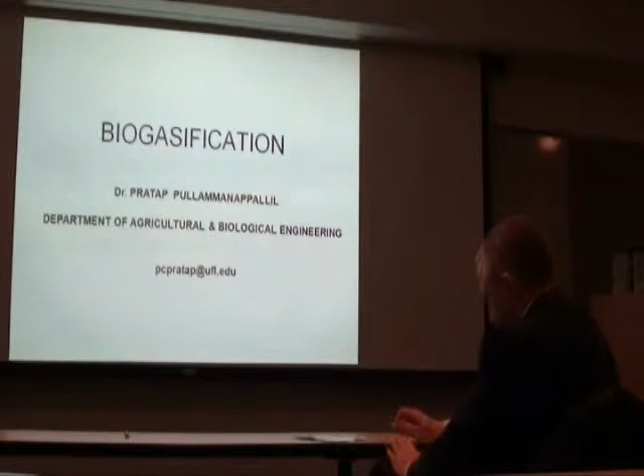We in this department have been working on what's called biogasification, that is producing gas fuels from solid biomass feedstocks. It could be biomass feedstocks, or municipal urban waste, yard waste, organic waste, food waste, all sorts of residues. The process involves using microbes, bacteria, to convert the solid waste.

Particularly the solid organic waste, to methane as a fuel. So the biogas is a fuel that's produced. It's a mixture of methane and carbon dioxide, about 70% methane. Some of you will be aware of this process as anaerobic digestion.

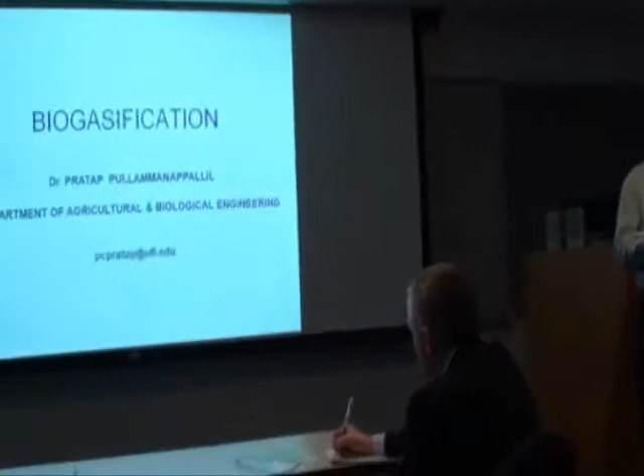Typically, anaerobic digestion is used in sewage treatment plants, to convert sewage sludge to biogas. It's also used for manure digestion, from livestock waste. But you can also apply the process for other feedstocks, like high solids feedstocks, energy crops, municipal waste, or any other organic matter.

We have been working on this area for the last 10 to 20 years, and have developed several designs. Some of it has gone commercial, some are being commercialized for different feedstocks. So I'll give you a run through a few examples of what we've done in the past.

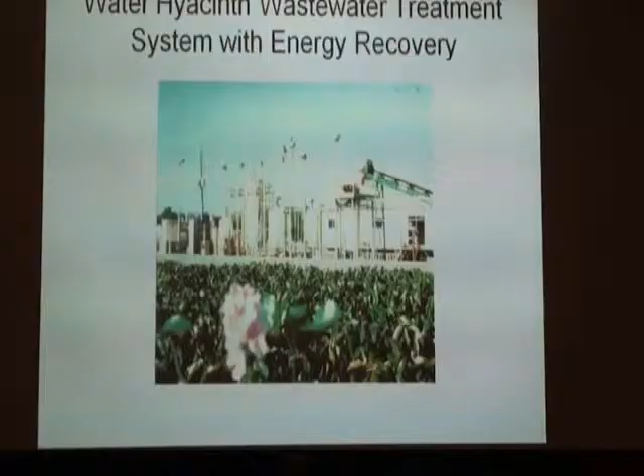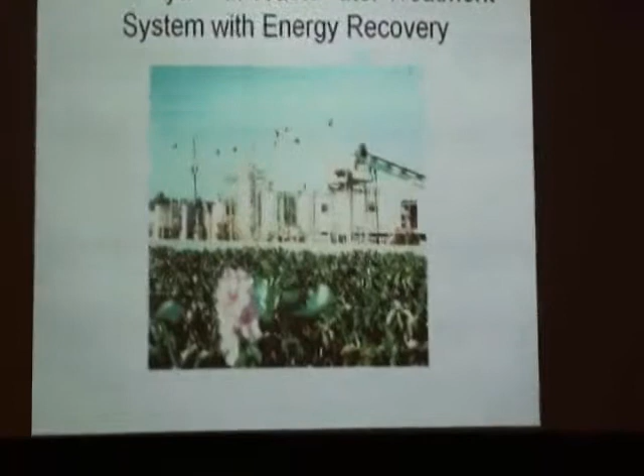We had it in Walt Disney World down in Orlando, the Epcot Center. This particular project ran for about 5 to 6 years. The purpose was to take the wastewater generated in the Walt Disney World Resort and treat it using the water hyacinth.

Water hyacinth is an aquatic plant. It takes up the nutrients and treats the wastewater. Then the next step was to convert the water hyacinth to energy, to biogas fuel.

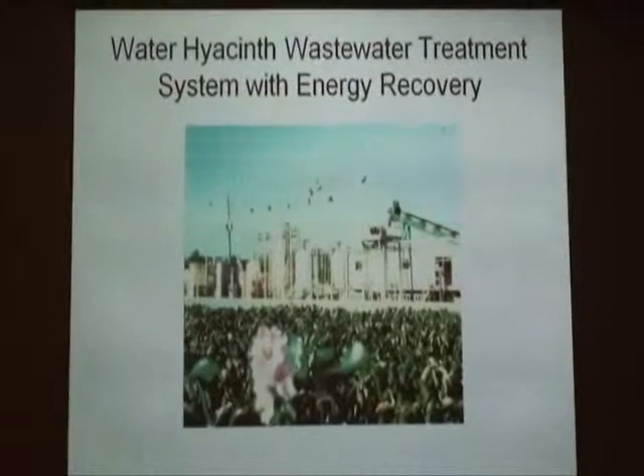So the water hyacinth was harvested and put into a digester. This is a digester. It's where you convert the water hyacinth to biogas as a fuel.

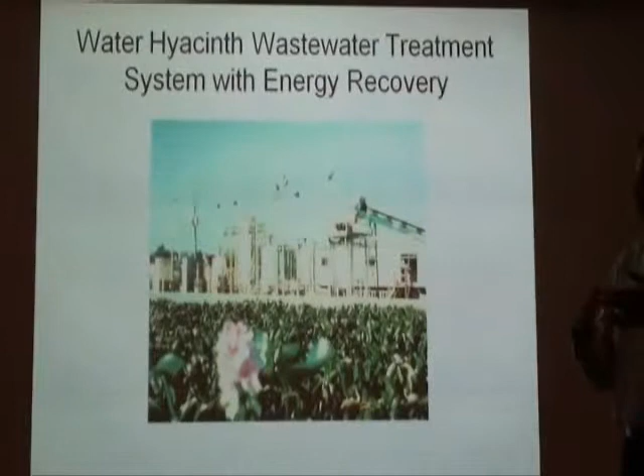This particular project was carried out for about 5 or 6 years, and this is like a demonstration project. What we demonstrated there was treatment of wastewater or sewage, plus production of energy from the treated aquatic plant.

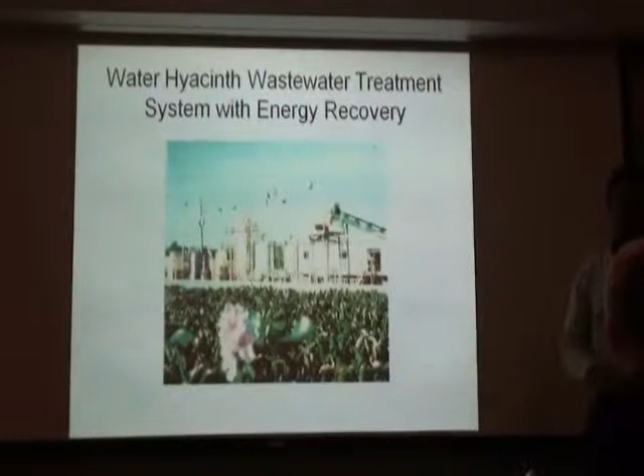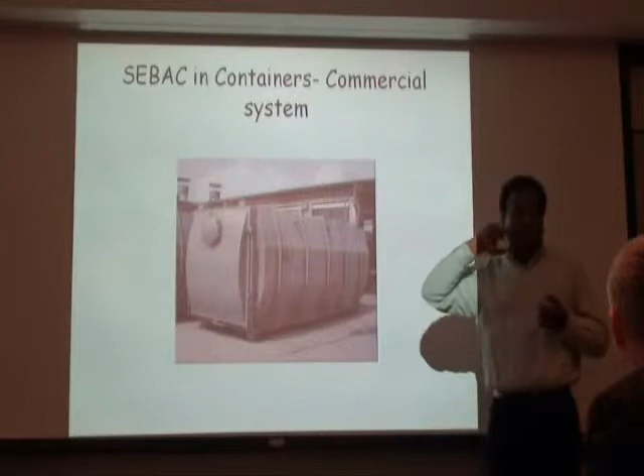This project is basically for urban waste. You can treat food waste, vegetable waste, fruit waste, any kind of organic matter. The process is called SEBAC, which stands for Sequential Batch Anaerobic Composting.

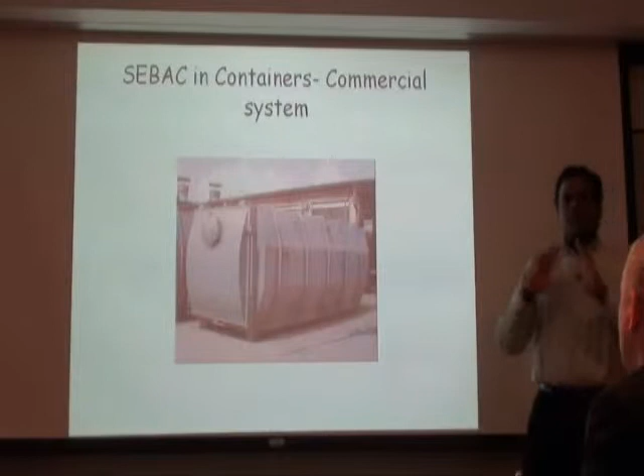The biogas production process is done in these containers. Each container can handle about 30 to 50 tons of waste. You load the container using front-end loaders, then seal the container, and start inoculating the waste mixture, and it starts producing biogas.

You run the process for about 2 weeks, recover all the fuel from it, open the container, empty the residue, and refill it with fresh waste, and the whole process is repeated.

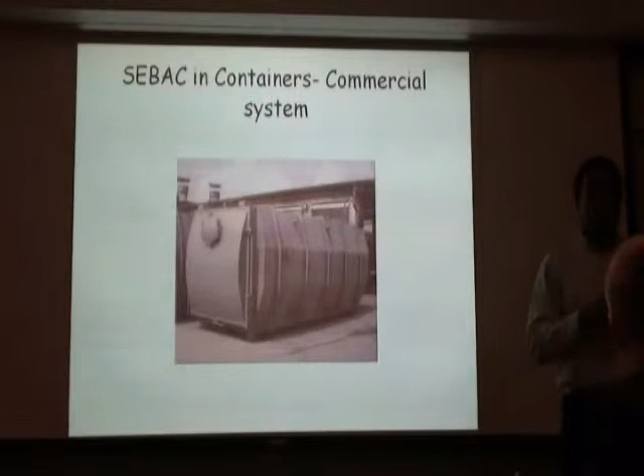This particular technology is being commercialized by a company called Sigarca, and they have a couple of these facilities in Florida. One of them is in Ocala, where they're treating a mixture of horse waste. There are huge horse farms down in Ocala, south of here, and a lot of horse manure is produced.

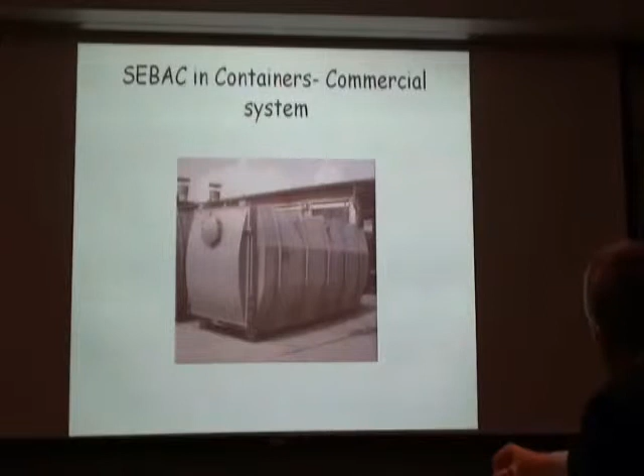And there's a lot of horse manure that's produced. This particular system treats the horse manure along with the food and vegetable waste generated in some packing houses near the place. So that's been commercialized.

Now this is a kind of a modification of the same SEBAC process, but this is a facility that we built for NASA. NASA was interested in this particular technology for space missions. When astronauts were going to stay on the Moon or Mars, they had a program, the Mars program, as well as the Lunar program, where astronauts would spend long times there, probably about a year.

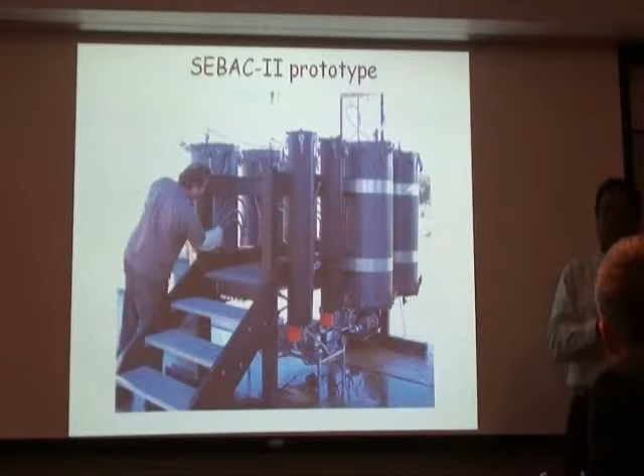The idea was to use this technology to convert their waste, which could be just food waste. Also in the case of the Mars program, they were also going to grow plants there, crops for food and for oxygen. So we take the biomass and produce methane from it.

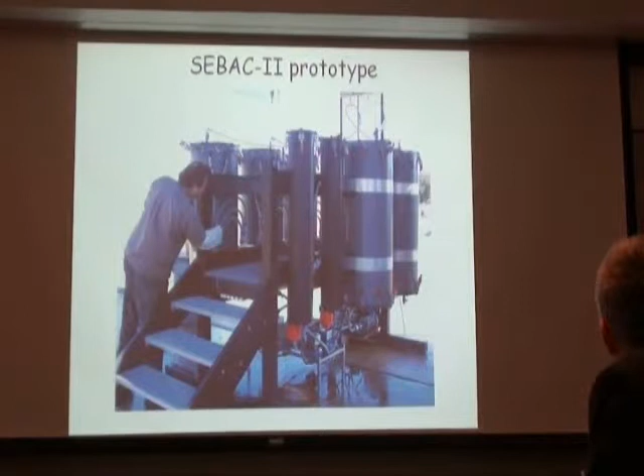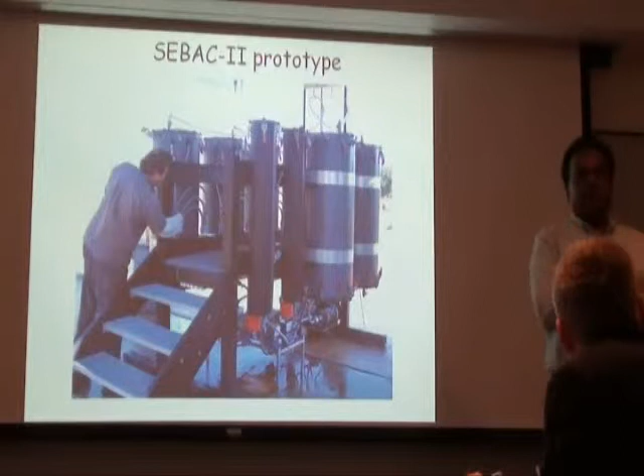This is a prototype that we built for NASA. Basically, this is a system that will take in waste from 6 astronauts for a period of a year, convert them to methane, and they were going to use the methane as a fuel to come back as propulsion. So that's a prototype for NASA.

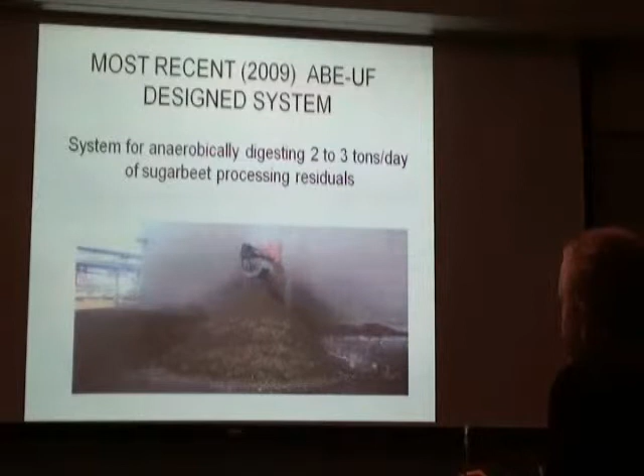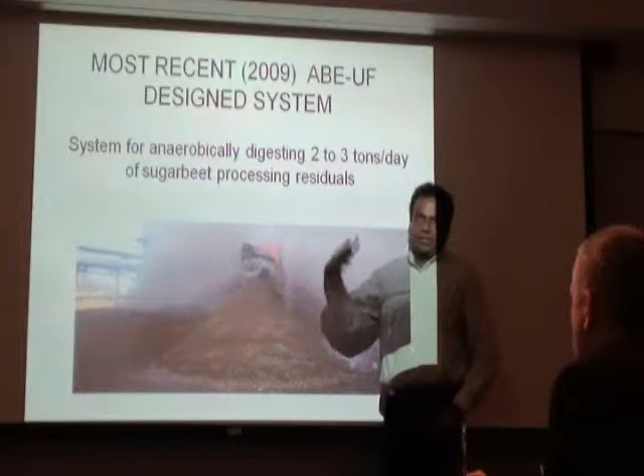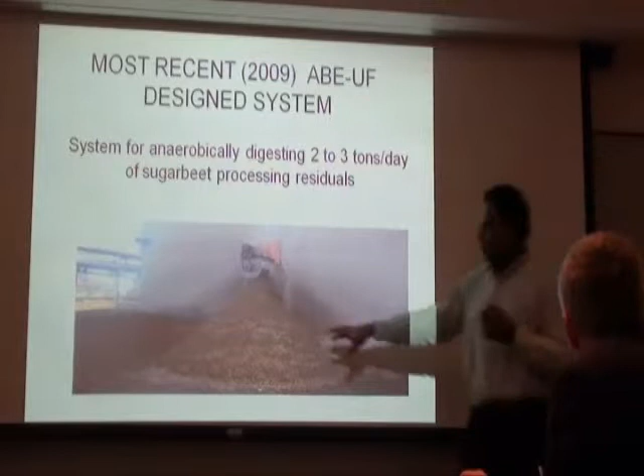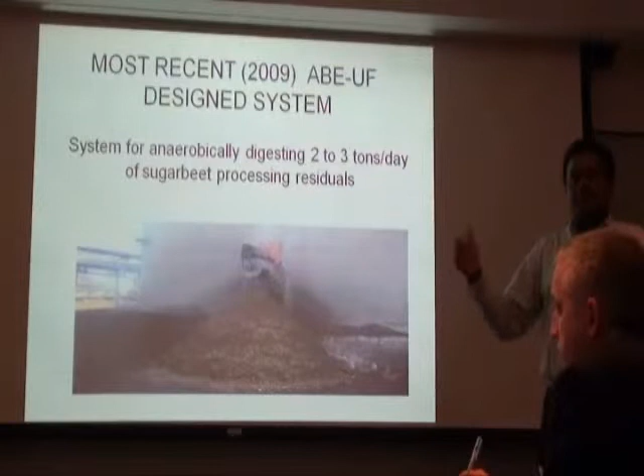This is the most recent system we designed, and it's a system to deal with this kind of waste stream from a sugar beet processing plant up in Minnesota and North Dakota. They grow sugar beets for sugar, and the process of making sugar generates a lot of waste stream. One waste stream is called sugar beet tailings—basically the roots and other stuff left when they clean the beets. So we designed a system for the American Crystal Sugar Company, which processes the sugar beets, to take these tailings and produce biogas, which would then be used in the sugar processing facility.

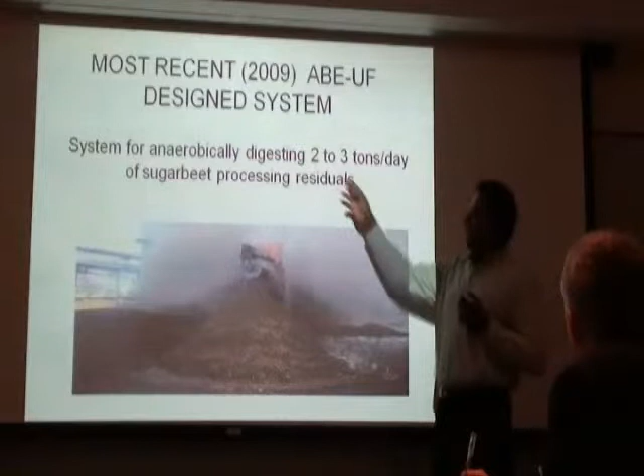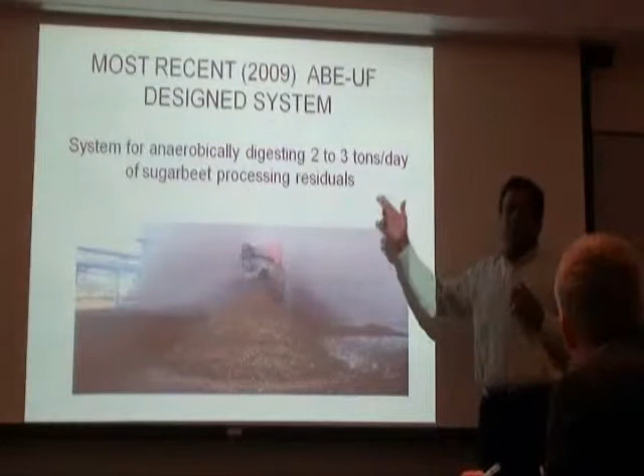The project was to design a demonstration system which will handle about 2 to 3 tons per day, to demonstrate the technology. And what they're doing now is taking the technology and scaling it up—they're building a 60 tons per day facility to deal with the tailings.

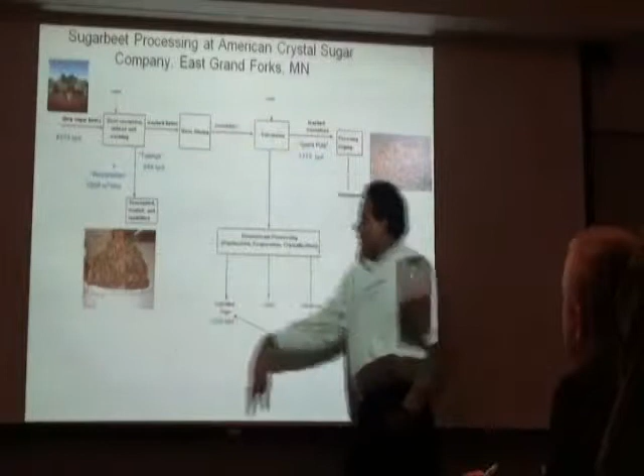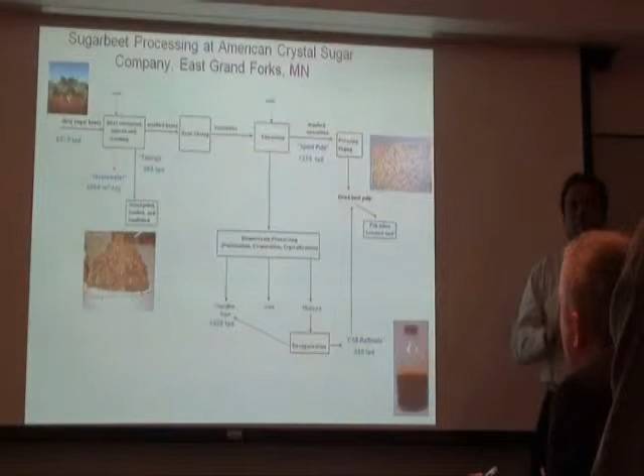So this is an example of the different feedstock waste streams we looked at from the sugar beet plant: the tailings, the spent pulp after the sugar has been extracted, and the raffinate. It's a combination of pulp, tailings, and raffinate fed into the system. By converting all this to methane, they can displace about 60 to 70% of the current fossil fuel or natural gas usage in the plant with biogas generated on site—a tremendous savings for them in fuel costs.

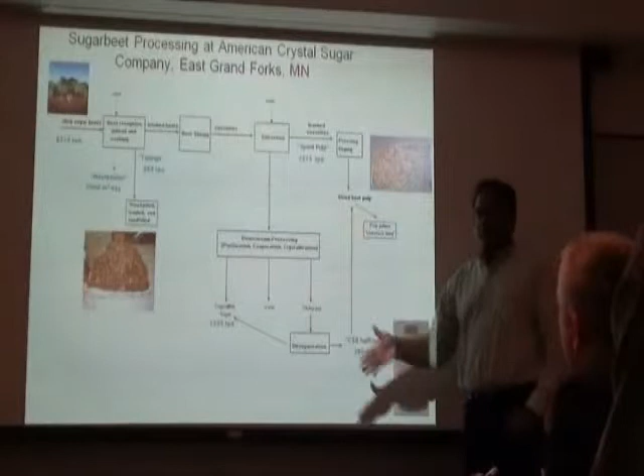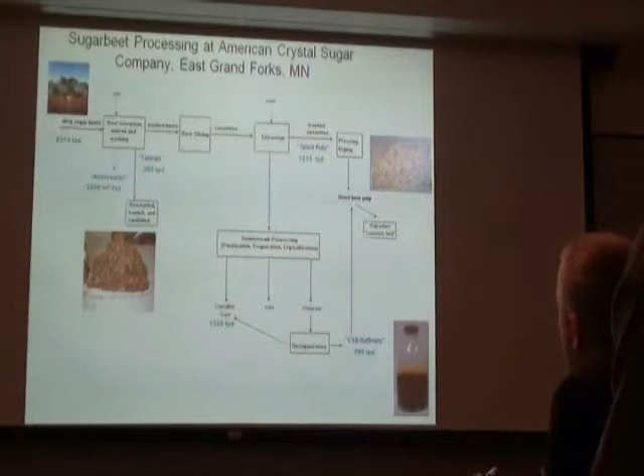We ran this particular plant for about a year or two, and it ran successfully, which is the reason they're going to a 60-ton-per-day facility now. So that's kind of an overview of some of the work we've done for the different biomass feedstocks to produce biogas. Any questions?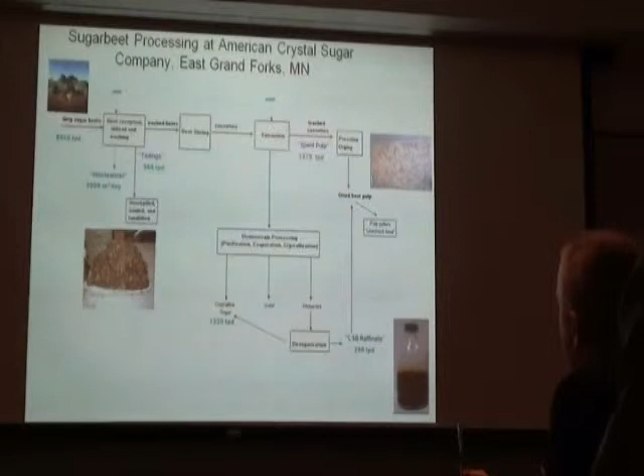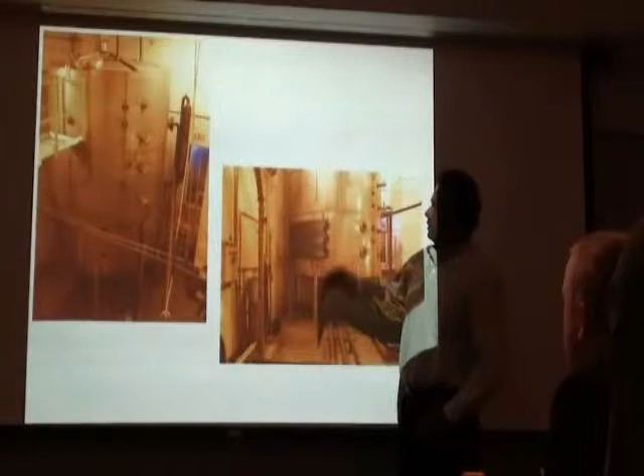So that's the system—those are the digesters we use for the sugar beet plant. These are the two digesters, 10,000 gallon tanks. This was before we insulated them, and you can see the heating system here, and those are the gas collection systems on top of the digester.

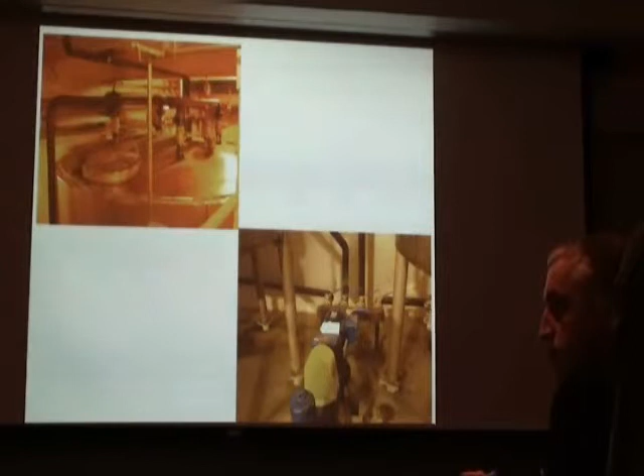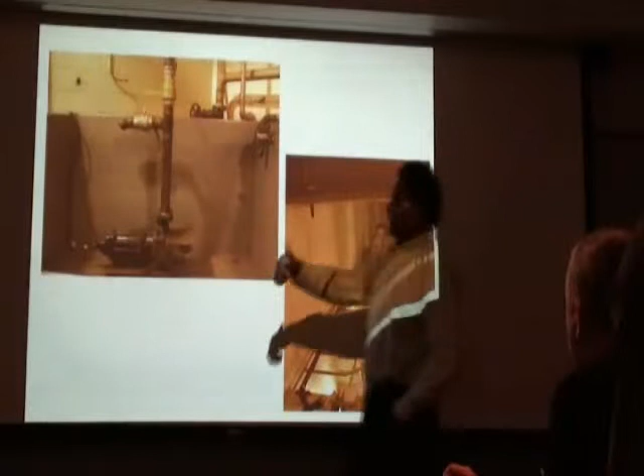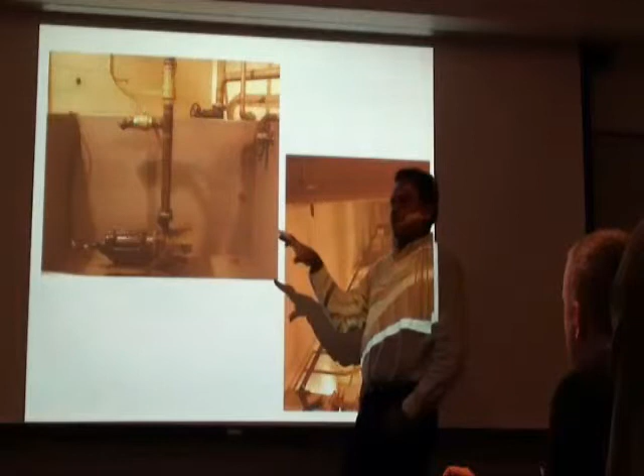Is it a continuous filling or a batch filling system? It's a continuous system. Basically we feed it—that's a feeding pump. The biomass is brought into this bin, and this is a trash pump which takes it up. We're trying to use an existing facility, the sugar plant, to do this process, so we had to take it up like 5 floors—the digesters were 5 floors up. So yeah, it's fed every day.

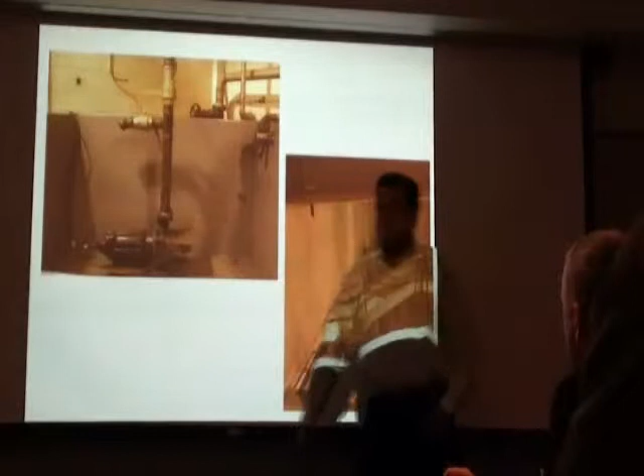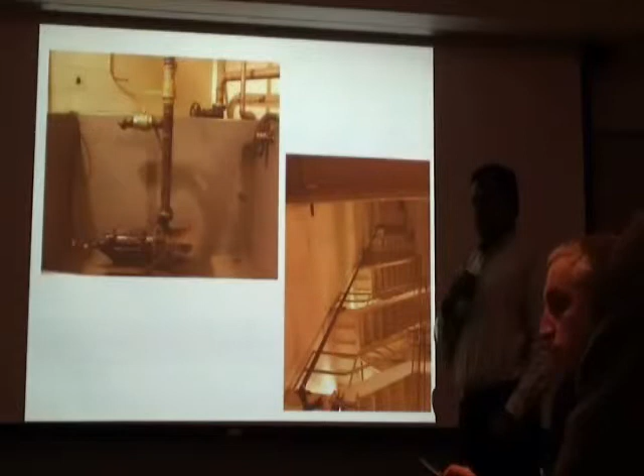Is dirty material like sand left over? About 90% of the material is degraded to biogas, so we still have about 10% residue you have to work with, and that's leaving the system—we bring it down and dispose of it.

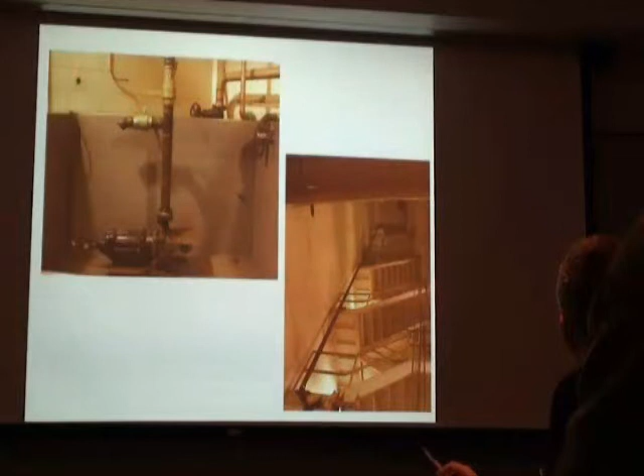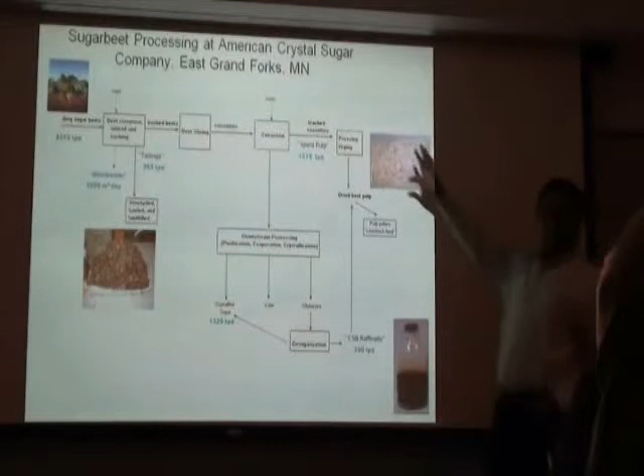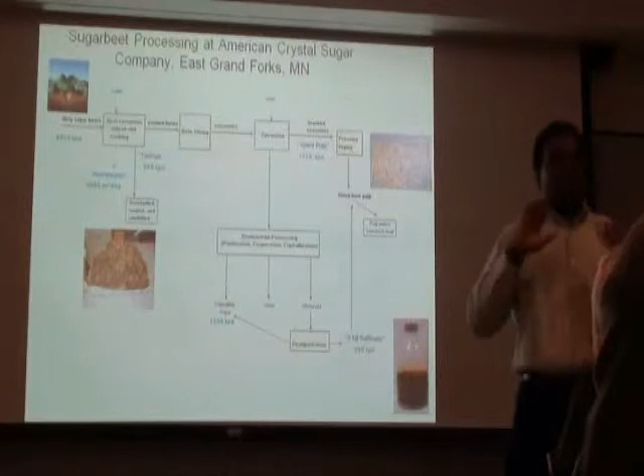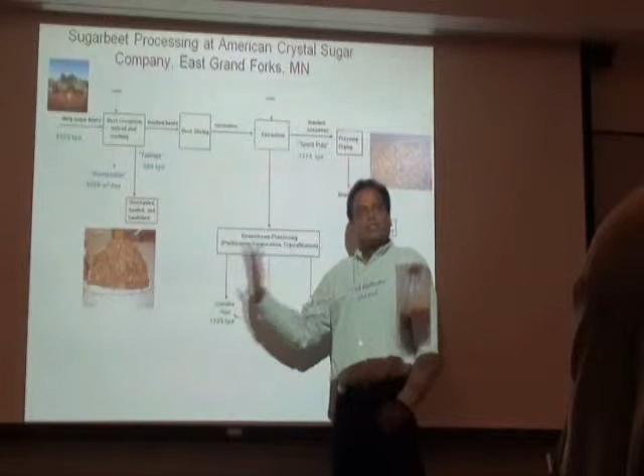Did you do some life cycle analysis or comparison in your proposal for using biogas versus using sugar beet residues as pellets? What they use—this stuff is usually set aside as cattle food, but they don't have a market for that. It's readily fermentable, and they don't have farms nearby where they can ship it. In fact, the cost of disposing these tailings is about $1 million or so a year. They usually mix the raffinate with the cattle food, but really there's no market for the raffinate either. So these two have no current market, which is why converting to biogas makes economic sense for them.

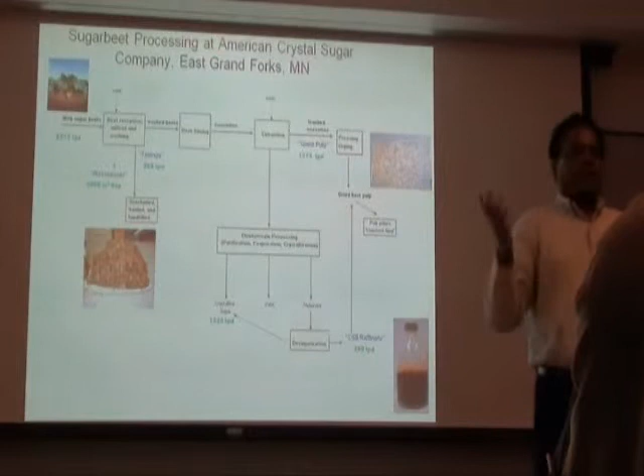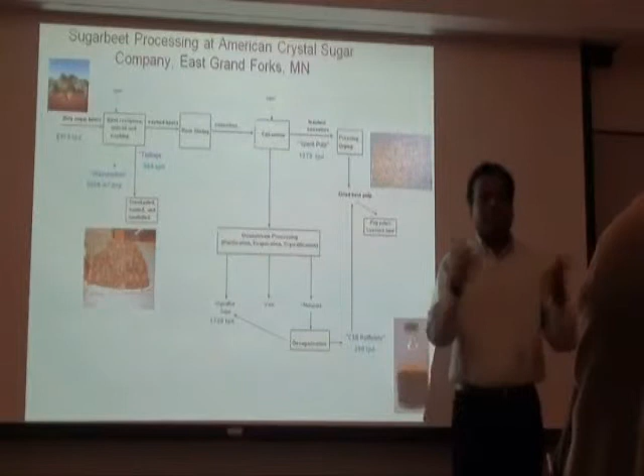Is your proposal to divide the residue into two flows, or combine them? It doesn't matter—we can mix all three. We tried different trials: sometimes all three going in, sometimes just the tailings. It doesn't matter, because the digester handles the different components, so it really doesn't affect the process.

In the first picture, we saw a container for 50 tons of biomass—is it producing heat energy also? Currently they're producing heat. They take the biogas through, I think, an internal combustion engine to make electricity, and the waste heat is used for heat.

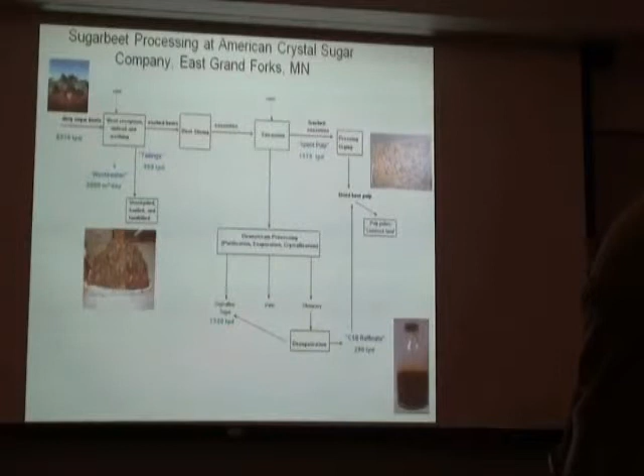Does it work in aerobic processes? These are all anaerobic processes—there is no oxygen in it, it's all anaerobic. That's why you get methane from the process.

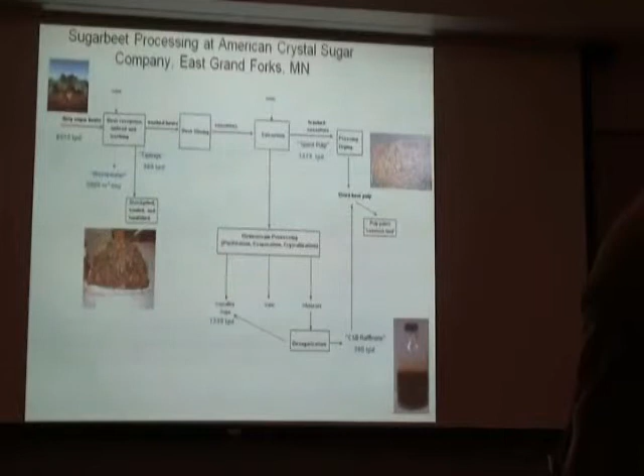After you get the methane at approximately 50-60%, do you do some improvement, or are you using this biogas directly? In the sugar plant, they're using it directly. All they do is remove some water, dry the gas, and remove hydrogen sulfide—that's about it. There's no upgrading, since it's used on site. But there are systems which can convert biogas to 100% methane; there are commercial processes available for that.